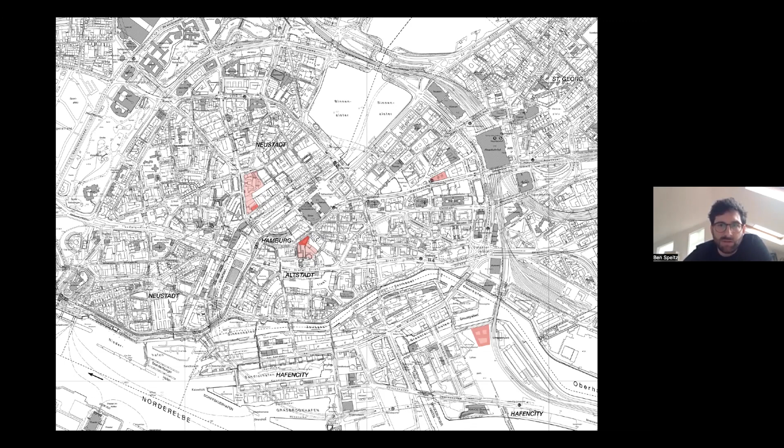The areas that can be activated within the existing building stock without pushing the density issue beyond its limits lies at the heart of Hamburg's urban planning today.

In these projects, we engage with the culture of the place as well as the specifics of the site. This is not a conservative position, but redeveloping a site or a building in an ideal world embodies the potential to bring together, or let's say, reassemble a collection of different urban realities, which as a condition today exists in many European cities.

Our competition entry for the extension of the Globushof, which is located within the same urban block as the Große Burstah, aims to find the right balance between inner city densification and a moderate building height.

Another important aspect of continuing to build the city is not about rebuilding the existing, but about developing it further, adding to it, seen from the eyes of pedestrians. Hamburg is made up of many uniform streets, but also individual places and diverse neighborhoods. So to avoid monostructural parts in the city, enhance the quality of life, and return the public life in the city, a building and lively facade can contribute to and mediate between the diverse cultural layers of a place.

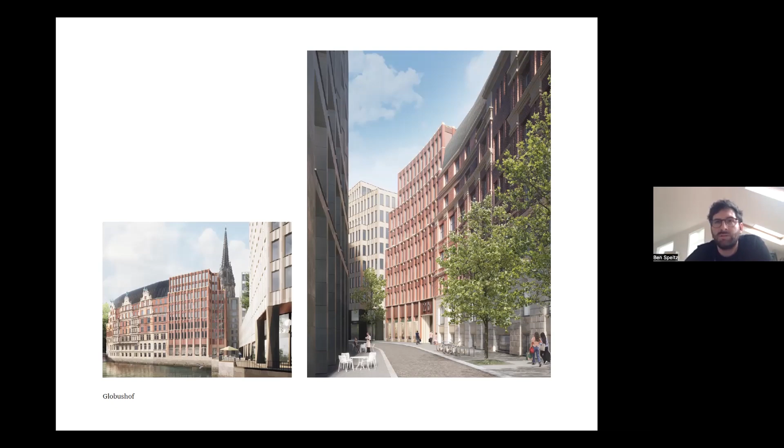Last year, we also worked on a feasibility study to transform the upper floors for the Kontorhaus Barkhof, situated on the Mönckebergstraße, which is one of the main shopping streets in the inner city of Hamburg. Built in 1910 by Franz Bach, the architect and developer was responsible for various other early versions of the Kontorhaus typology, all built about 10 to 15 years before the more well-known Chile-House and Sprinkenhof by Fritz Höger.

Based on a challenging task here to reconfigure basically the plan of the top two floors to create a certain flexibility that can accommodate both offices and housing, this idea will hopefully become an exemplary project for buildings of the same type in Hamburg.

Bringing housing back into the center of the city is a main objective of Hamburg City Council for the near future.

At the same time, it is important to refurbish these existing structures, and in the case of the Barkhof, also change the design of the roof with the addition of new dormers and gables to reinstate the importance of this magnificent building, which today still plays an important role in the history of Hamburg at the beginning of the 20th century.

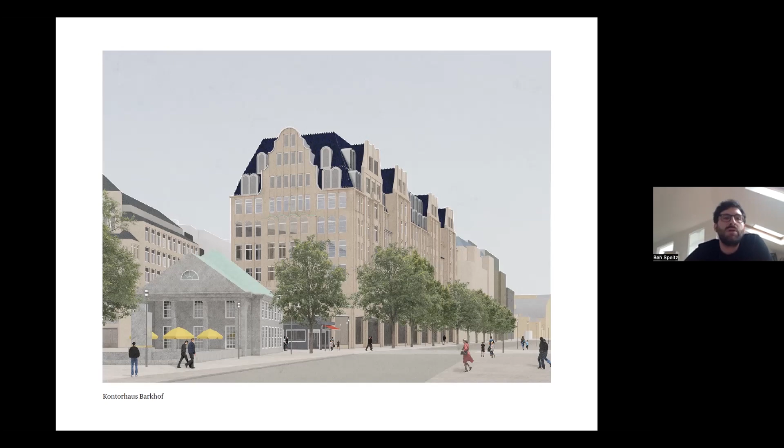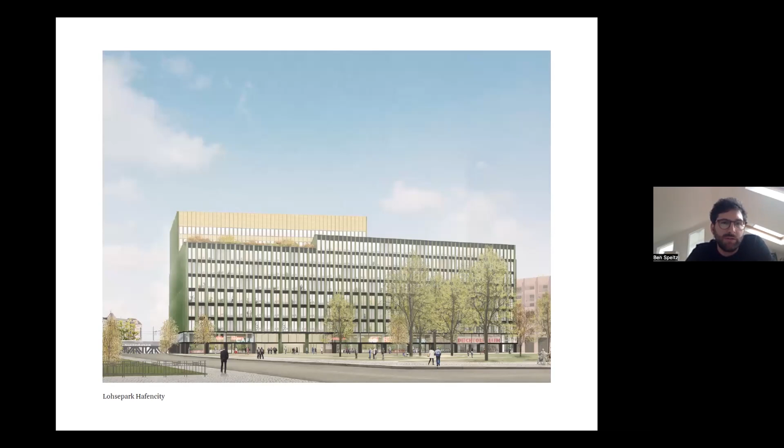This mixed-use building on the northeast corner of Hafen City is a project that is currently on hold, but was won in a competition in 2018. The new building makes a distinctive face to the Lohsepark, an already established park by Vogt landscape architects. The building appears as a strong figure beside the river to the north, the large structures of the Oberhafenbrücke, and the railway towards the east.

The solidity, vertical proportion, and sculptural quality of the green terracotta facade, and the organization of the building around a network of 3 interconnected courtyards, makes a reference to the large Kontorhäuser from the 1920s, which have a strong influence on the urban scale of the city today. The flexible organization of the block itself will enable a good mixed-use program in which the use is interchangeable in the future.

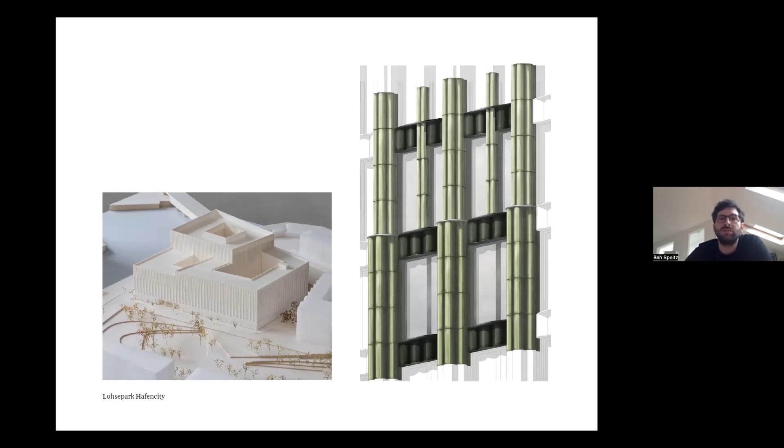2 of the projects that I will talk about in more detail now are located within the former city walls, and their morphology within the city, even today, is defined by the surrounding bridges and canals.

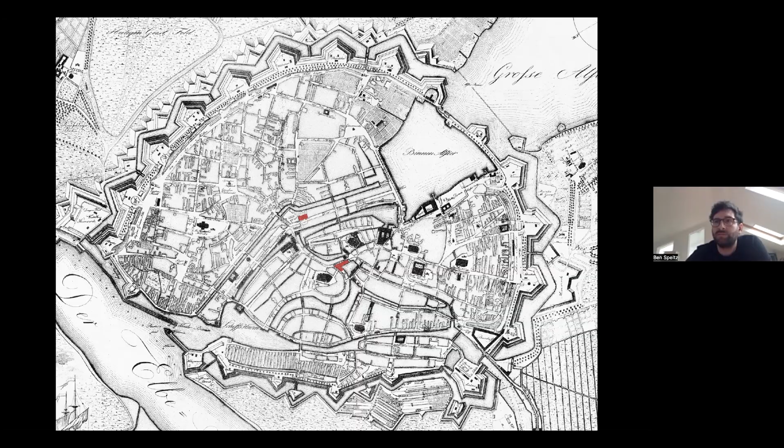The Goetzpalais, a project the office started working on in 2017, is a conversion of an existing building that forms part of the Stadthöfe, a versatile ensemble of buildings with a new mix of retail, hotel, offices, and some residential. Quantum are the developer of the whole complex, and we led the design to the planning stage and worked further on the detailed design for the Grade 1 listed building. Construction finished in 2021, and the project was delivered by local architects HN Architekten.

The ensemble consists of 8 buildings grouped around 6 inner courtyards that span along the Bleichenfleet. It is located on the Neuer Wall in Neustadt, a busy shopping district today. The central street is about 600 meters long and stretches from Jungfernstieg on the Binnenalster lake to Stadthausbrücke on its southern end. Left and right, the building's back sides are flanked by the Bleichenfleet and the Alster River.

After its overall transformation, the Stadthöfe form a new conglomerate of historic buildings in which a network of public spaces has been reinstated. The history of the Goetzpalais on the Neuer Wall goes back to the 18th century and is an important building in the history of the city. It was the first building on the newly created central street within the 18th century city extension.

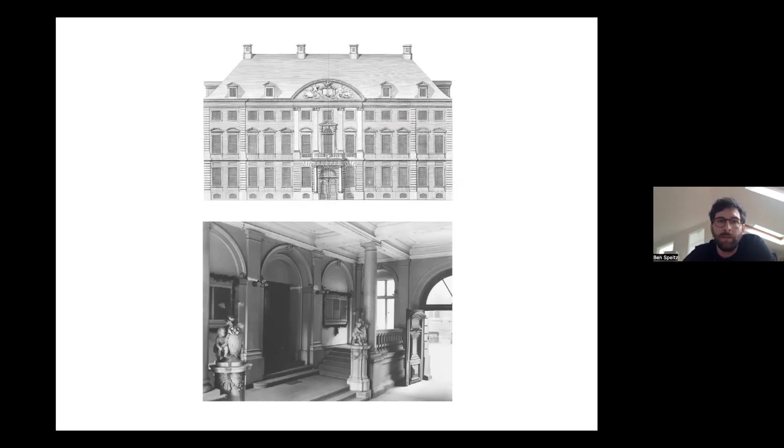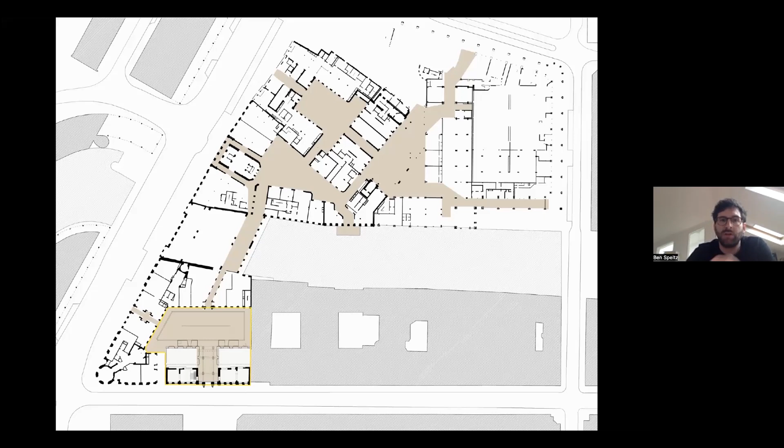The courtyards, which are connected to each other with passageways from the Palaishof to the Stadthof and Treppenhof on the north, are occupied by selected shops and restaurants and form a new public attraction today. Various architects worked on the revitalization of the historic buildings, and each courtyard was given an individual character.

At the start of the project, it became evident early on that the existing 50s office building was not able to absorb the needs of the overall development. At the same time, the existing building stock was in quite a poor condition and not able to meet current regulations, especially fire regulations and modern standards.

After many discussions with Jörn Walter, who was the Oberbaudirektor, so the city architect at the time, and negotiations with the Heritage Department, the so-called Denkmalamt in German, it was decided to partially demolish the existing building stock. In summary, the proposal removes the 1950s building behind the historic facade and makes a new 5-story building with suitable floor-to-ceiling heights for retail and offices.

The foundations of the historic building, or let's say historic facade, needed to be reinforced to guarantee its stability, which would not have been possible by keeping the 50s extension. During demolition, remains of the original columns and archways of the ground floor were discovered, as seen on the right-hand side image, some of which were restored and incorporated in the new scheme.

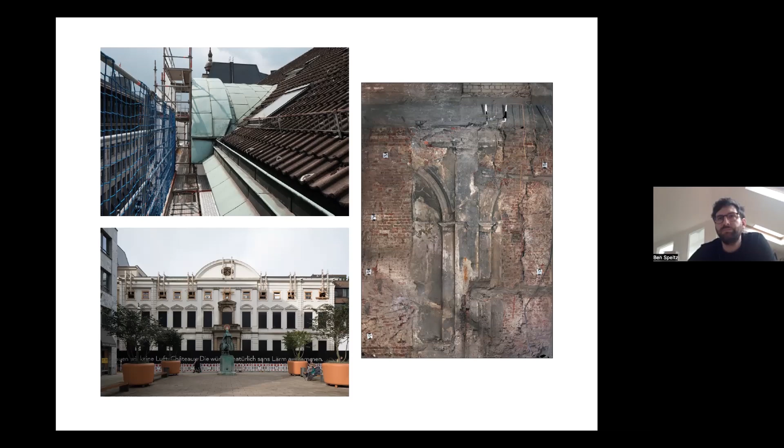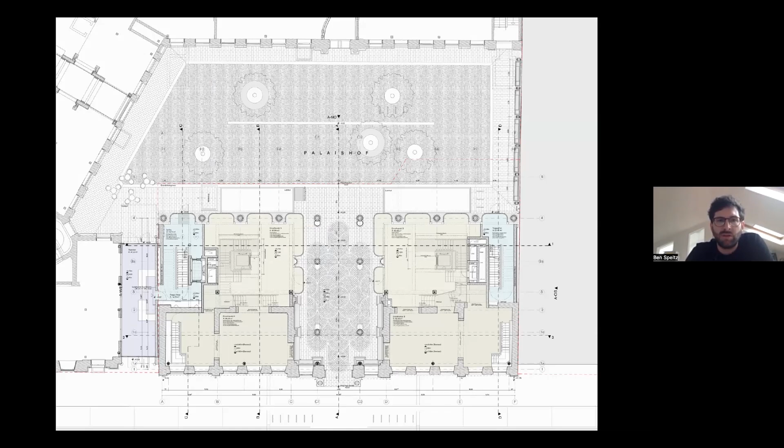On the ground floor, the project opens up the historic carriageway from the Neuer Wall to the courtyard behind, here in the center of the plan, which in the 1950s was blocked off by the office building that existed at the time. Where some of the existing masonry walls could structurally be integrated, a grid of new columns holds the office floors above, with 2 new circulation cores at either side of the building, placed in the same position as the original stairs.

Towards the back, a new thin layer of shop-front windows undulates between the columns and creates a more transparent ground floor within the passage. The language of the new columns, painted in a dark color and light coffered ceiling, comes from an interpretation of the original Baroque architecture.

A new pattern floor, benches along the walls, and 6 clusters of lighting globes create a more intimate and atmospheric space that invites visitors to linger. This perspective shows the view looking from the street entrance to the Palaishof at the back.

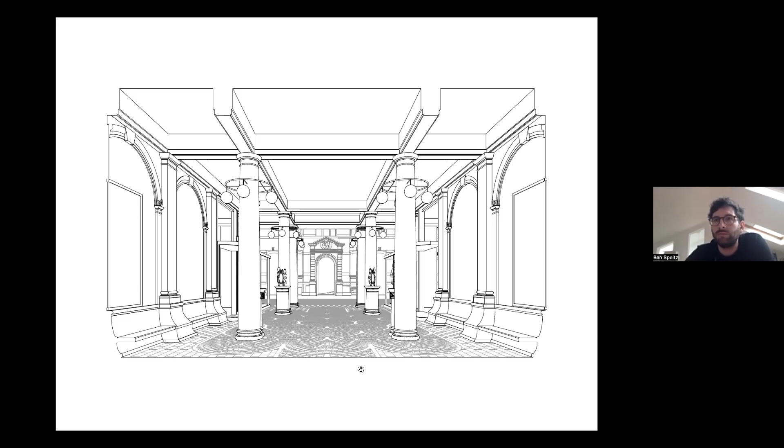The composition of the back facade, with locally manufactured clinker piers and light precast horizontals, follows the rhythm of the internal office grid, and most importantly, creates a relation to the existing courtyard facades to make a new whole. The beige or almost white color of the concrete elements refers to the color of the limestone of the existing front facade.

On the ground floor, large bay windows create a visual connection between the indoor spaces and the public yard. The 1st floor has a projecting railing, which emphasizes the role of the 1st floor as a piano nobile.

The new roof structure of the listed building refers to the character of the Baroque building as it existed up until the war. The proportion and volume of the new roof feels more appropriate in relation to the main body of the building. A new set of dormers within the pitched roof, clad in dark metal, brings light deep into the attic space.

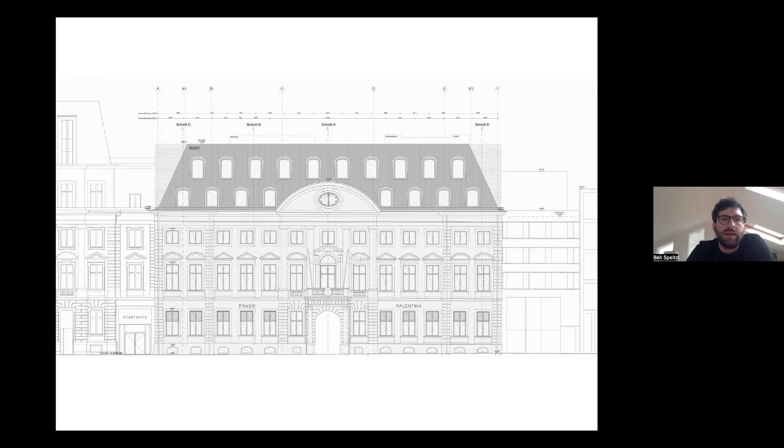This also helps to re-establish the liveliness of the front elevation and historic significance of the Görtz Palais within the streetscape. When you look up the sky, the diagonal placement of the dormers forms a new, exciting pattern on the roof, making a reference to the Baroque language of the facade and the composition of dormers and chimneys that used to be part of the original 18th century design.

Within the passage, some of the original stucco fragments that were revealed when the 50s building was stripped back are being preserved. This might be the only moment today where a pastiche-like distinction between old and new is clearly tangible.

So the project I'm going to talk about next was a competition that the office won in 2014, almost 10 years ago. It was for a new 15,000 square meter office building in central Hamburg. We started working on the design stage in 2016, and in 2018, a Hamburg-based developer called Built-in Real Estate took over after the initial client from the competition decided to drop out.

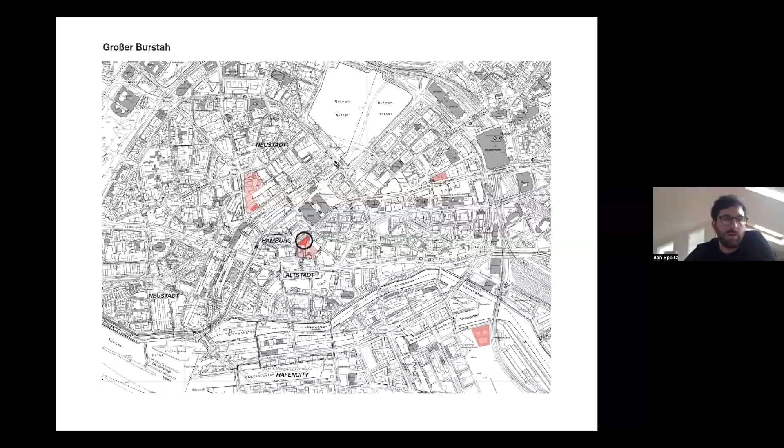The site is located next to the Rathaus on the north and bordered by the St. Nikolai Church towards the south, of which today only the reconstructed church tower and spire remain. The main elevation of the site runs parallel to the Großer Burstah, a street that merges with the Mönckebergstraße and ends with the Hauptbahnhof on the north.

This historic map from 1590 shows that the site lies within the former city walls, and most importantly, its proximity to the Nikolai Fleet, which used to be one of the main canals in the Altstadt of Hamburg. Dating back to 1200, it is considered one of the oldest parts of the ports of Hamburg. The Fleet was the original branch of the Alster, which today forms two lakes in the city center, both prominent features in Hamburg's cityscape.

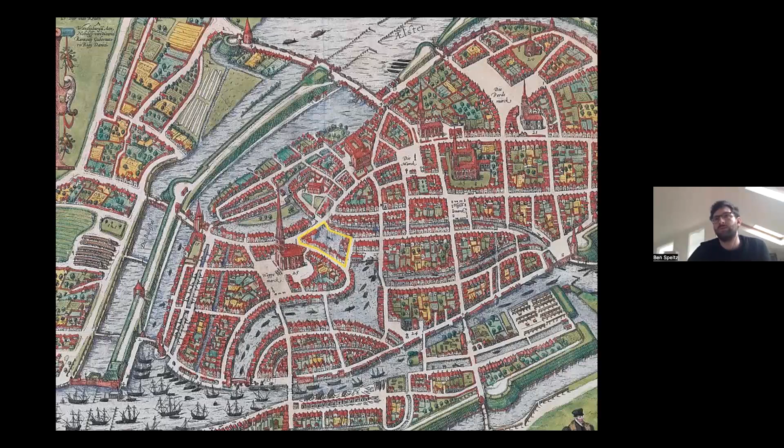So on the one hand, the new building needs to form a face towards the Großer Burstah, an important urban street with a 19th century scale.

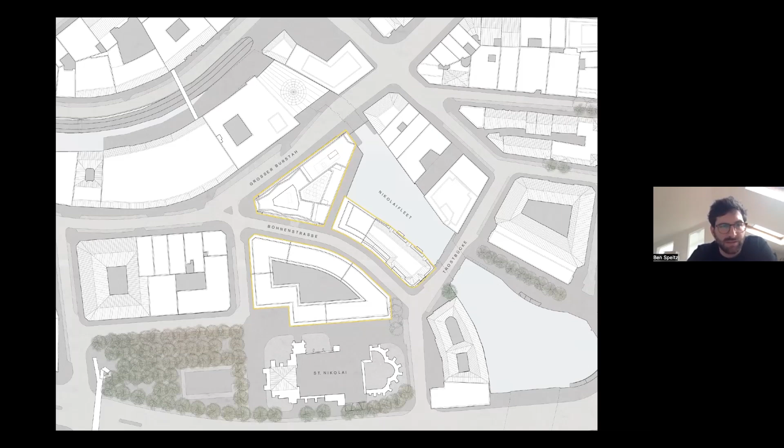At the second phase of post-war modernism in Germany, from the mid-1960s onwards, the city of Hamburg decided to further densify its inner city. For the area between the Großer Burstah and the Neue Burg, this meant that existing early 20th century buildings had to be demolished.

As a consequence, the existing city layout was drastically changed, and the Bohnenstraße, whose original footprint goes back to the city fabric of the 15th century, was also abolished, serving back then as a delivery yard and car park entrance for the new office building.

The new complex was divided into a low-rise building, which hardly fitted into the existing street lines, and a high-rise building which rose up as a solitaire with a total of 15 stories. The facade had all-around balconies with a cladding of anodized metal, which gave the building an abstract-looking horizontality and an amorphous building mass.

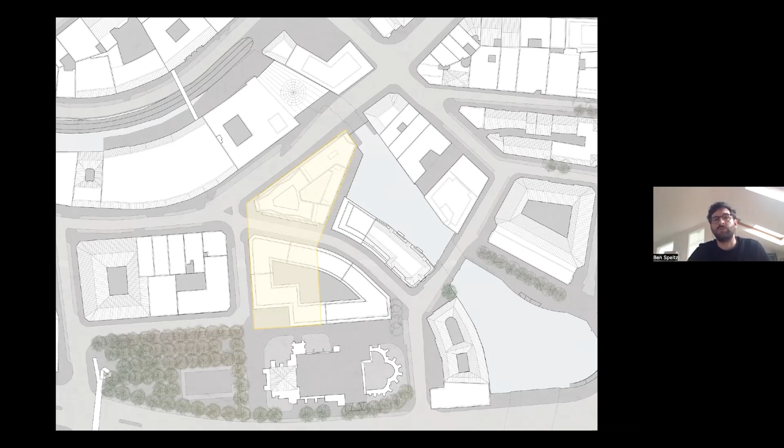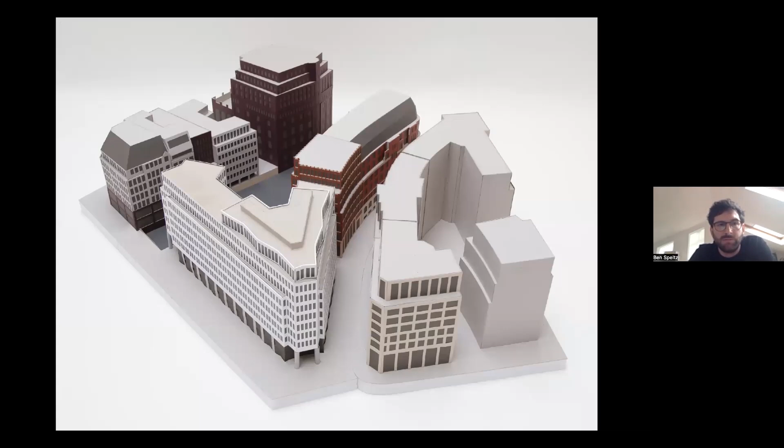The proposed building mass of our design for the corner building allows a better interlocking with the historical streets of the surrounding city, and further increases the permeability of this inner city quarter. The facades of the new build are given the right proportion to address the range of different situations of the block. The form of the building creates distinct moments and views within the urban fabric.

We have modified the massing at the head of the building, shaping a face instead of a rounded or pointy corner. This faceting gives the building a more vertical proportion that rises powerfully from the ground and allows for a stronger presence when viewed from the street.

When looking along Großer Burstah, the corner forms an impressive figure in the street. The facades contribute to the richness and quality of urban space that characterizes this part of Hamburg's Altstadt. The head of the building accommodates the main entrance on the ground floor that connects to the upper floor offices. A second entrance and lobby along the street allows the desired flexibility for multiple tenants.

The vertical figure is an idea that can be applied to the other corners of the triangular site, tying the building's irregular sides and conditions into a new whole. From the water side, a vertical face grows upwards from the public terrace on the canal, forming another strong figure at the center of this unusual scenery.

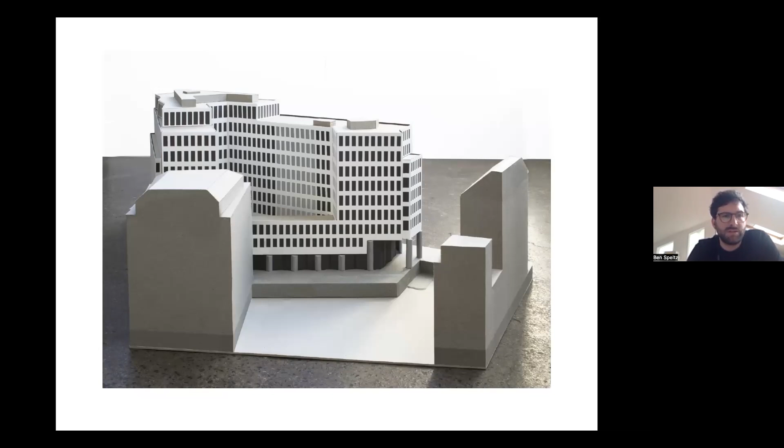This model also shows our proposal, as I'm pointing out now, for the extension of the Globushof that would complete the block as an extension of that existing building and become part of the overall composition. As mentioned previously, we did not succeed in the competition, and it is unclear today how the gap will be filled.

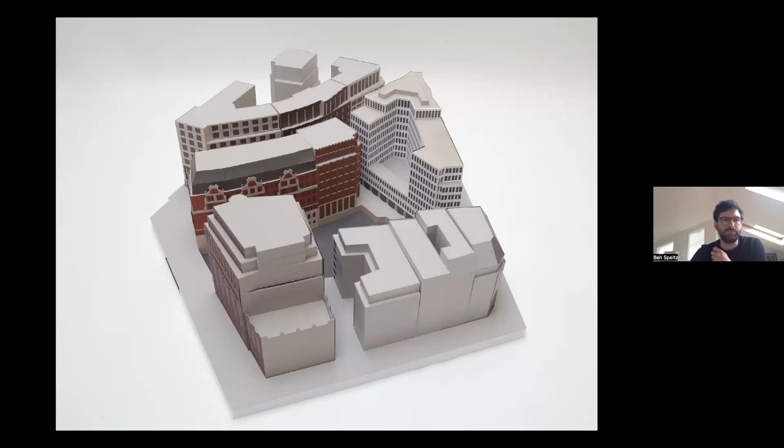Along the terrace facing the Fleet, the canal, horizontal glazing on the ground floor creates an excellent space for a restaurant or a cafe. The widened terrace is an ideal place for outdoor seating in the summer and provides a sunny, sheltered spot away from the traffic noise. This outdoor corridor between the northern arcade and the Globushof connects to the Bohnenstraße on the south and enhances the network of spaces that used to characterize this part of the city. The building contributes to the public realm and enhances the relationship between urban space and the quality of life.

The facades differentiate between the base, middle zone, and top of the building to bring the volume closer to the proportions of the surrounding buildings. Mineral facades in light color rise from a base designed in dark shades. The base zone of the building has two-story pillars with shopfront windows stretched between them on the ground floor. The top of the building is set back on the 7th floor and jumps back again on the 9th floor, giving the new building an expressive crown.

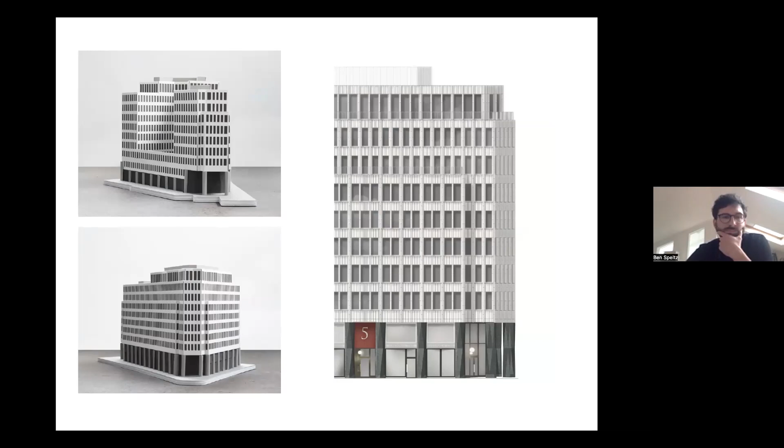The building has a total of 10 stories, of which the ground and first floor are combined to form the taller plinth. The cross-section here indicates the stepping back on the 7th and 9th floor towards the Großer Burstah on the right, and shows the lower part of the courtyard that opens up towards the Fleet on the left-hand side of the drawing.

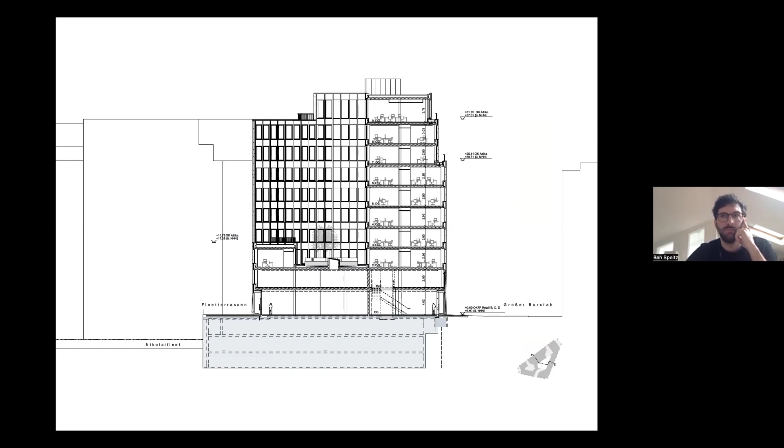On the ground floor, commercial and retail units are located between and around the office entrance courts on all three sides. The two arcades are located on either end of the building along the Großer Burstah, with the one on the north connecting the street to the waterfront. This drawing also shows how the water edge is reshaped along the terrace to create a more urban and generous space here, as previously described.

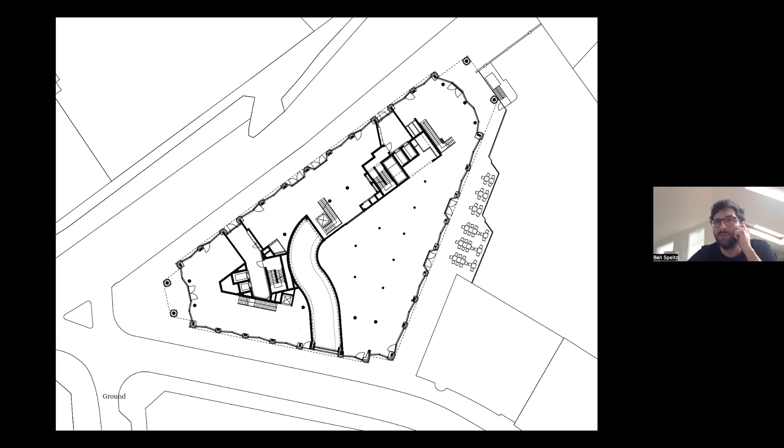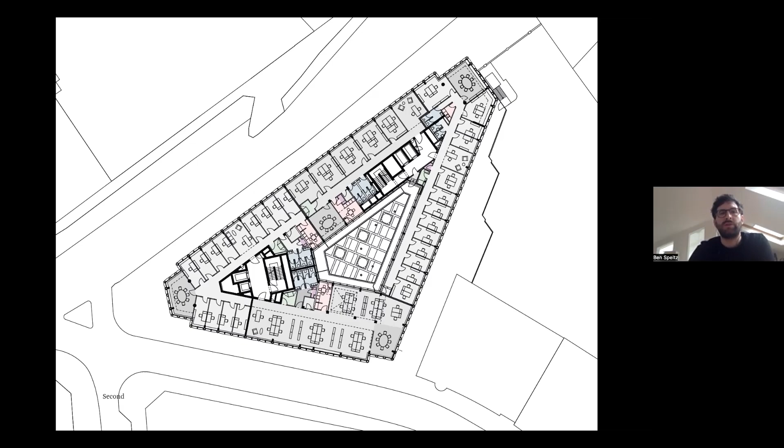The organization of the floor plan creates excellent office space along the facades. The arrangement allows each floor to be flexibly subdivided to accommodate several tenants. The two lift cores allow separate access for up to four units per floor. The narrow depth of the wings and the generosity of the glazed facades create a throughout well-lit and healthy office environment. This drawing shows the second floor with a green roof in the center of the plan, accessible directly from the offices around.

The regular floor plate, or typical plan, basically follows the organization as previously described, but on the 3rd floor, the massing of the building changes to open up the courtyards towards the canal. On the 7th and 8th floors, the facades step back slightly along the two main street elevations. On the 9th floor, the special plan shape of the facade and the higher floor to ceiling heights give the building a special crown at the top. This also creates further terraces with fantastic views over the city.

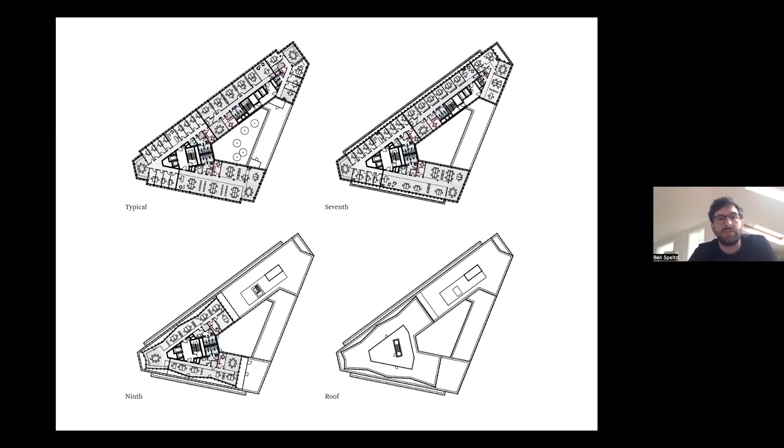As most of the surrounding facades around the site are masonry, we felt from the start of the project that a thin glass skin for the building would not be appropriate. The more significant aspect, however, is that there's a tradition of delicacy and richness of detail in the surfaces of these facades, a characteristic of many older buildings in the urban landscape.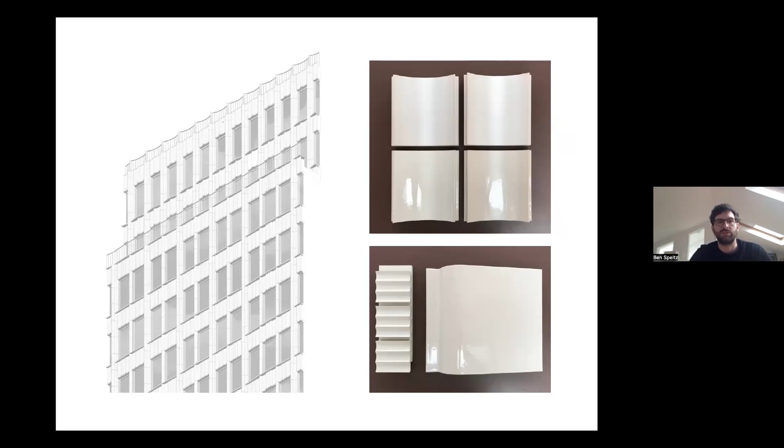The cladding system works with different facade elements that are joined to each other in different ways, creating variations in scale across the entire view and bringing out the different proportions of the facade. We made one-to-one models to study the proportion and constellation, or composition, of the different convex and concave shapes that are being woven together.

Due to the size of the project, only a very limited number of suppliers are available today to produce the required amount of facade elements. They all work with a highly industrialized manufacturing process, setting the parameters for size and finish. So the terracotta was produced by NBK, with whom we developed the light glaze and the bespoke steel dies to create the facade profiles.

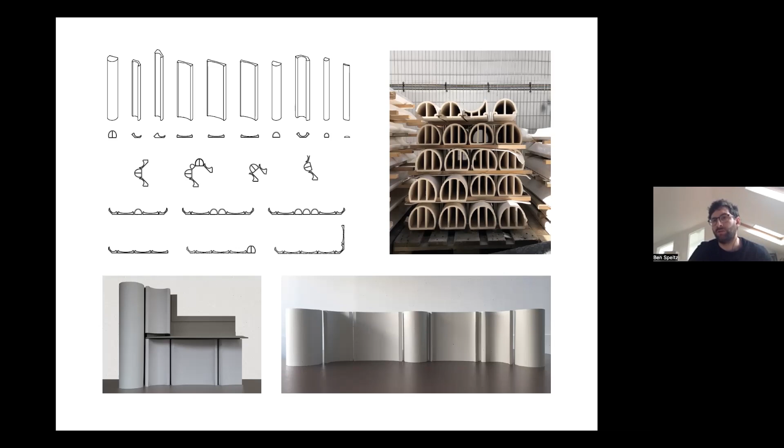NBK used an extrusion kiln with a large conveyor belt where the ceramic travels through the oven and firing can be tightly controlled. In comparison to a standard box kiln, this process is more cost-effective but, most importantly, requires less operational energy. Kilns at NBK are about 40 meters long, but they are limited in height, which defines the maximum size of the profiles at circa 140 millimeters. This would become a driving factor for the detailed design of the facade.

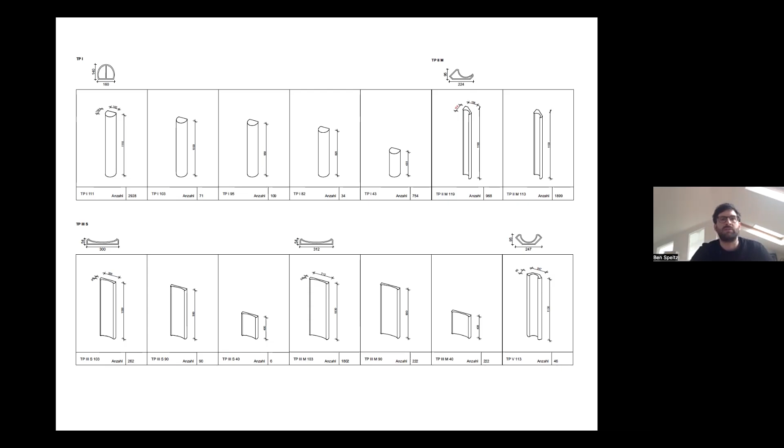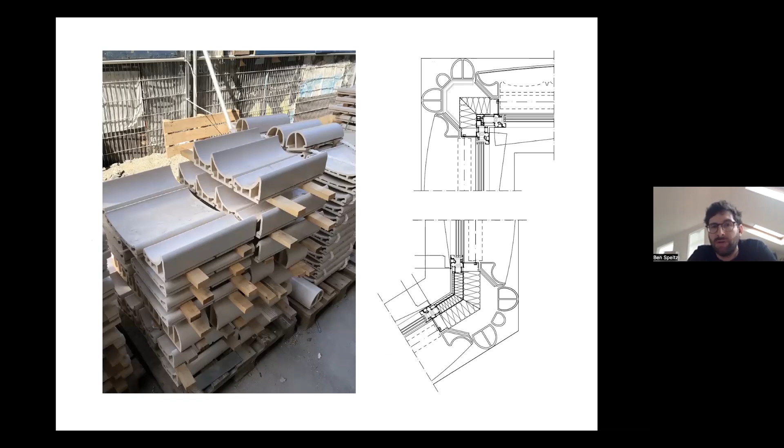These and the previous pictures are from our site visits when the building was under construction in summer last year. The corners, as seen in these detailed drawings, are composed of the same elements as the regular facade types, so that the number of dies could be reduced to a minimum.

The 7-story facades along Großer Burstah and Bohnenstraße have a wider proportion. Here the emphasis is on the 2.6 meter wide facade division. The short elevations and the top floors of the building follow the finer 1.3 wide division. As the building rises to the sky, the windows are more vertical, which emphasizes the verticality of the whole facade.

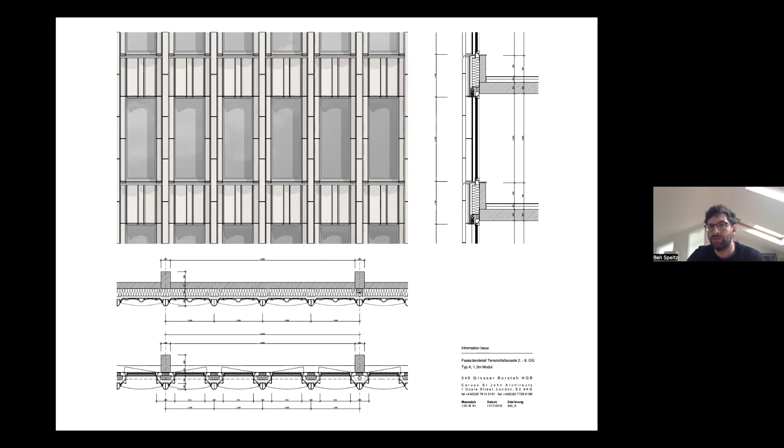The unusual sharpness of the extrusions creates a subtle play of shadows. And another important aspect of the design is the regular system of joints of the ceramic elements, which create a pattern across the entire facade.

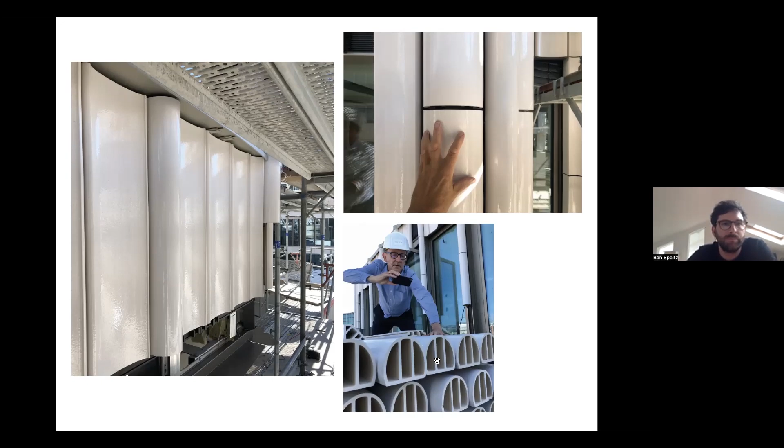The terraces on the top floor offer a fantastic view over the city with the spire of the Rathaus City Hall at the northeast end of the building.

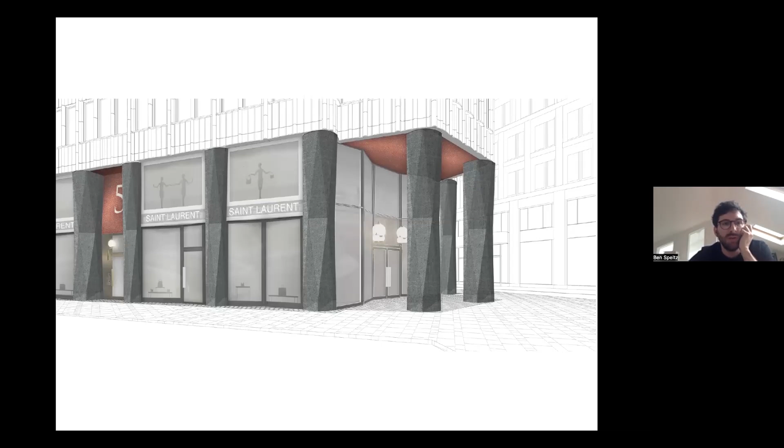On the ground floor, the base of the building is formed by a colonnade of dark prefabricated concrete columns in a wider spacing than the office grid of the upper floors.

The double-story plinth is characterized by the sculptural quality of the pilasters, which frame the generous shopfront windows of the ground floor. The columns are not load-bearing, but follow the rhythm of the structural columns behind.

The geometry was developed in a way that pilasters can be adjusted to their specific locations. Therefore, for example, the freestanding column of the arcade is assembled out of 4 elements from the basic module.

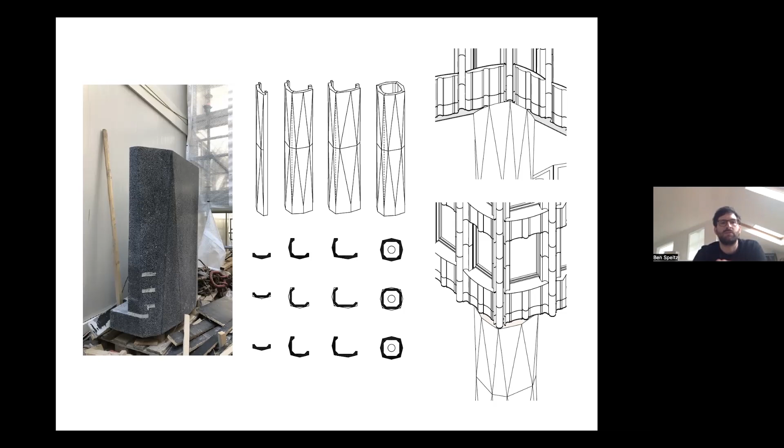On the left-hand side, you can see a mock-up that shows the monolithic appearance of the pilasters. The black aggregate will become visible by polishing the surface of the precast element. And for an even distribution of the aggregates, it is best to cast the elements horizontally, which was another reason to split the columns into several segments.

The ground floor glazing is slightly kinked and bends away from the columns. There are several variants of the same facade bay, which are either designed as display windows or accommodate recessed doors that lead to the lobbies on the ground floor.

To emphasize and distinguish the entrances, special colored circular tiles are mounted above the doors and onto the ceilings of the arcades at both ends of the main elevation. The round format allows the complex geometry of the ceiling surface to be evenly filled.

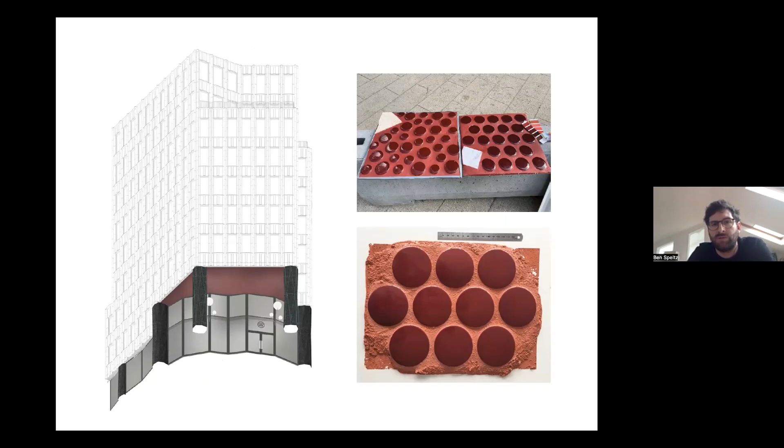I want to apologize here quickly for the bad photography throughout the presentation. Both buildings, this and the Goetzpalais, will hopefully be photographed in spring this year.